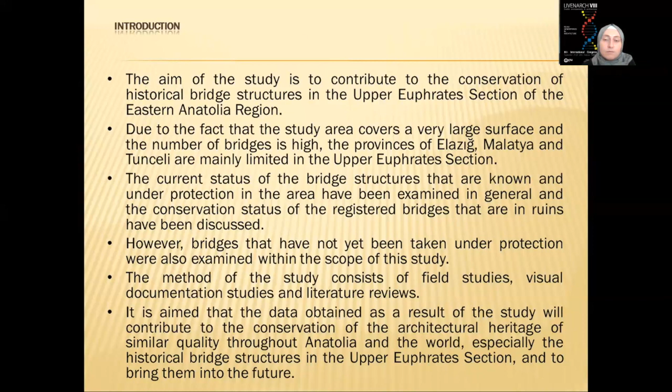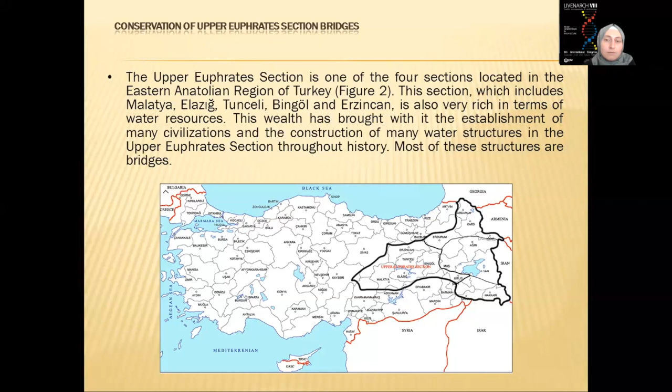The upper Euphrates section, as you can see on the map, includes Malatya, Elazığ, Tunceli, Bingöl, and Erzincan provinces, and is also very rich in terms of water resources. This wealth has brought with it the establishment of many civilizations and the construction of many water structures in the upper Euphrates section throughout history. Most of these structures are bridges.

Restoration projects of 12 bridges in Malatya, 6 bridges in Elazığ, 1 bridge in Tunceli, and 2 bridges in Bingöl have been prepared, we know. However, only some of these projects have been implemented.

In Malatya: Arapkir Meydan bridges, Tarhanik Bridge, Kale Bridge, Kozluk, Mavilik, Darende Uzunok, and Nadir bridges. In Elazığ: Maden Bridge, Şadyan Bridge, which you can see in this photo, and Polu Bridge, shown here. And in Tunceli: Pülümür Hanım Bridge, also shown here - these are some of the bridges that have undergone restoration.

Within the scope of the study, on-site observations were made in Elazığ, Tunceli, and especially in the Arapkir district of Malatya. According to this, the existence of 27 historical bridges in Elazığ, 10 in Tunceli, and 21 in Arapkir have been determined. However, field studies continue.

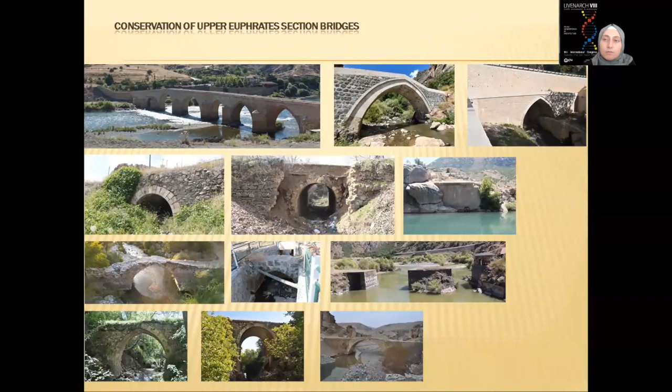So many examples of historical bridges examined on site within the scope of the study, and we can see that some of these structures are abandoned and in ruins, and it's seen that if conservation work is not done quickly, they face the danger of extinction. In this context, the conservation problems of these structures were discussed and suggestions were presented.

So we saw some conservation problems detected on the bridges in there. Some of them, floods and overflows, are the most important conservation problems of bridges. The temperature differences are also important, and especially the change of transportation routes is an important factor in the abandonment of bridges. And also excavations for treasure under and around.

We saw many excavations on the area that under and around bridges negatively affect the strength of structures. And some many registered bridge structures, no conservation work has been carried out yet, and no written, visual, and survey-based documents have been created. For this reason, some bridges can disappear with almost no documentation about them.

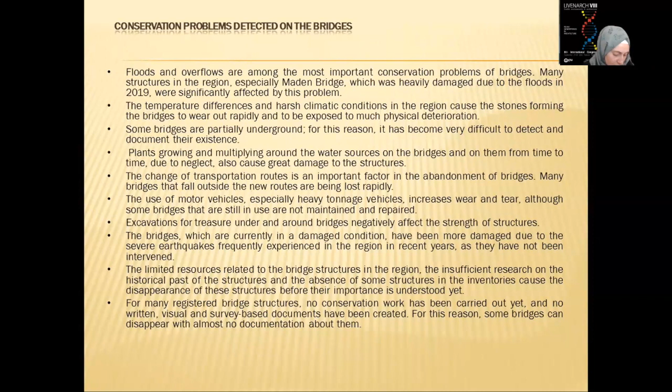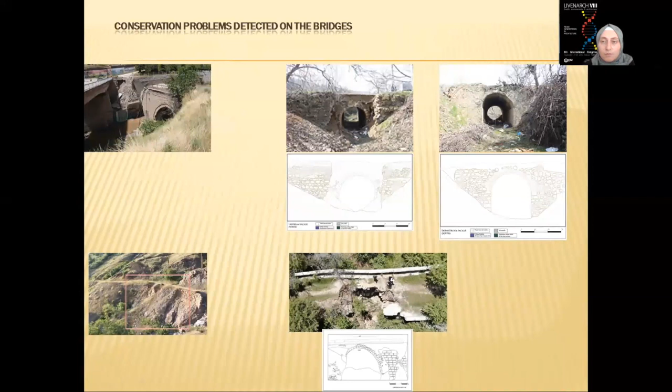You can see the other problems on our full paper also. You can see some problems on these bridges, flood and overflows, abandoned bridges, unfortunately, and some changing roads. Because of the changing roads, they are not using now. So there are some conservation problems detected on the bridges that we see.

As a result, as conclusion, within the scope of the study, approximately 58 historical bridge structures, registered or not, were examined on site. It has been determined that the buildings have common conservation problems in general, and that each has its own problems. In the study, especially common problems were revealed, and we have some suggestions about that.

I will not read all of our suggestions. You can see all of them on our full paper also.

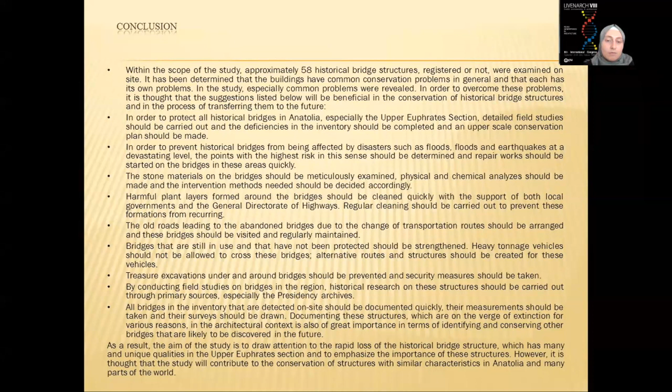So as a result, the aim of the study is to draw attention to the rapid loss of the historical bridge structure, which has many and unique qualities in the upper Euphrates section, and to emphasize the importance of this structure. However, it's thought that our study will contribute to the conservation of structures with similar characteristics in Anatolia and many parts of the world.

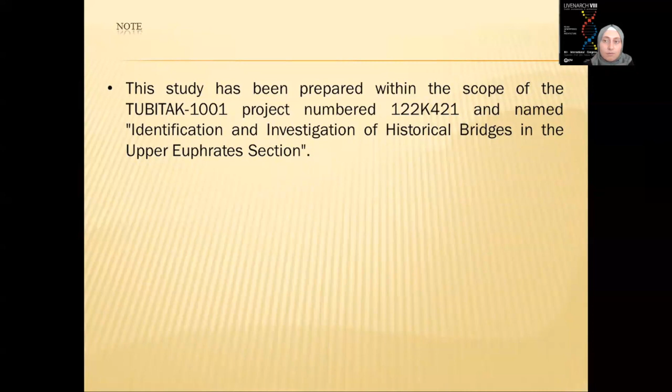And I'd like to add this note that this study has been prepared within the scope of the TUBITAK-1001 project, and its name is Identification and Investigation of Historical Bridges in the upper Euphrates section. The project is continuing. I believe that we will discover many bridges in this area and our references. Thank you for your attention.

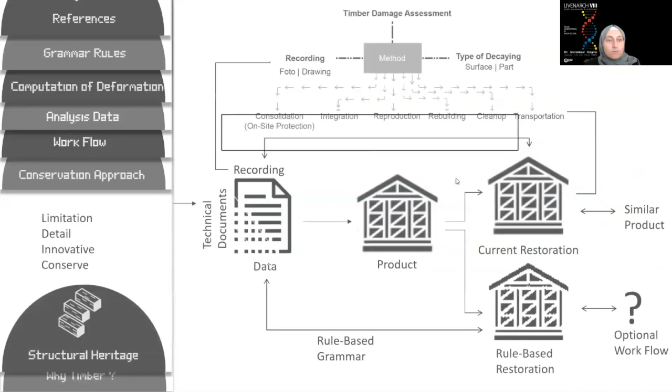After that, when we look at the current restoration process, the records utilized are based on conventional recording methods, such as technical documents and photographs. In addition, since the operations performed in the existing restoration method have a linear workflow, in this study, since the proposed approach method is rule-based, we can control it step by step.

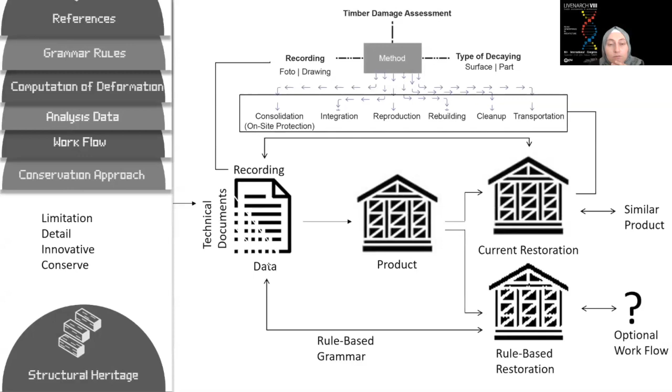The records used are considered as data. These data are considered as intangible heritage.

As a case study, the Göceli Mosque in Samsun Çarşamba was taken. This mosque was built with wooden masonry technique and the original joint details are visible. Since then, it has undergone two separate restorations and has been included in the restoration process again this year. As far as it has been examined, deformation and collapses have occurred on the roof of the building.

When you look at the south facade, and here, there is an element that is a buttress. Such an element is missing just opposite.

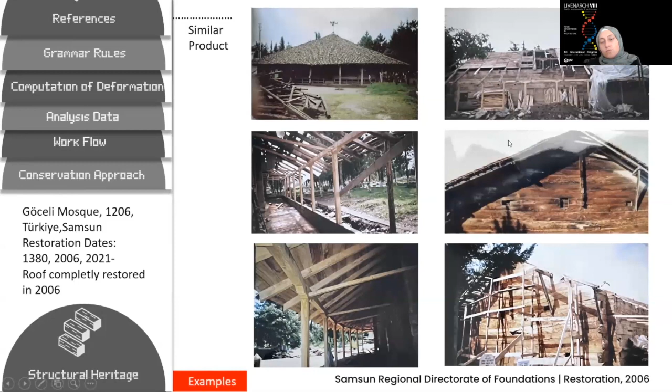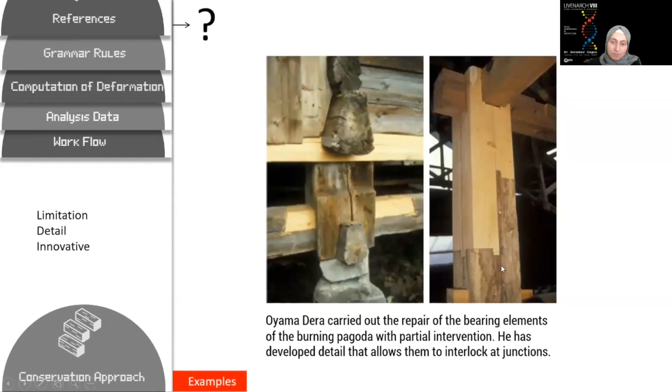In the end, we incorporate the minimum intervention method into a traceable restoration process, and we can incorporate the technique that reflects the oral knowledge developed between masters and apprentices with a computational approach in the restoration process. This carpentry knowledge is intangible heritage, so we must use this knowledge.

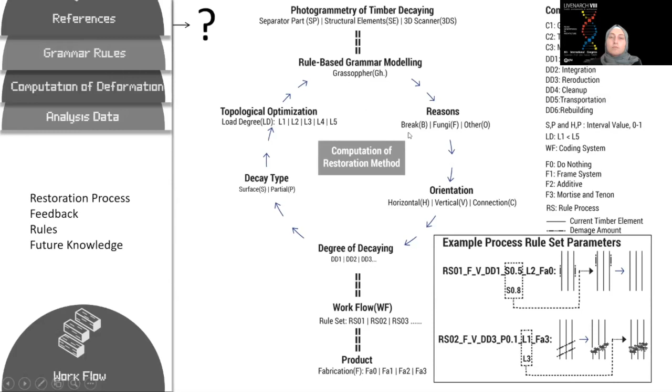As a result of the workflow, production can be made. In fact, it can create an identity of the historical structure element. Now let's talk about the analysis.

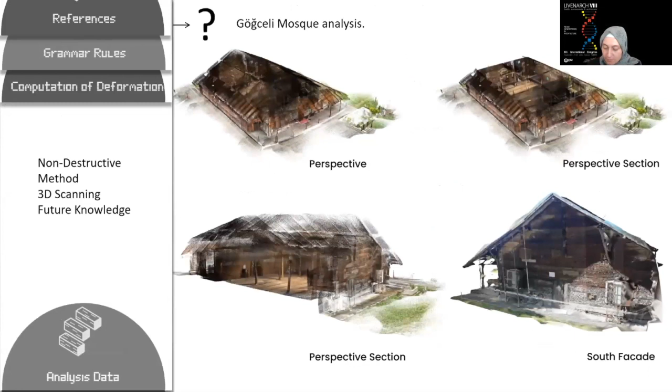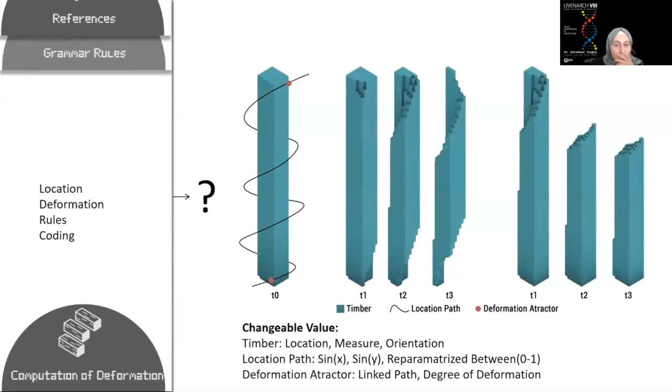Integral to the detection of this degradation process, a topological optimization, number one, is also included. The intersections of the places where the load passes and where the deformation occurs are obtained digitally. This result determines where to apply the rule-based grammar.

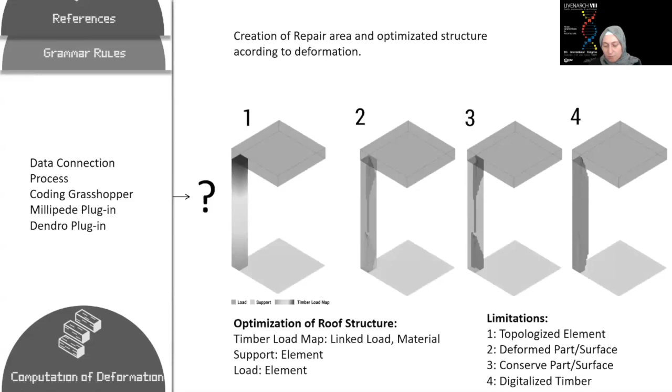After that, as for the rule-based grammar, the rules were obtained according to the way the joint detail comes together and the mortise and tenon situation.

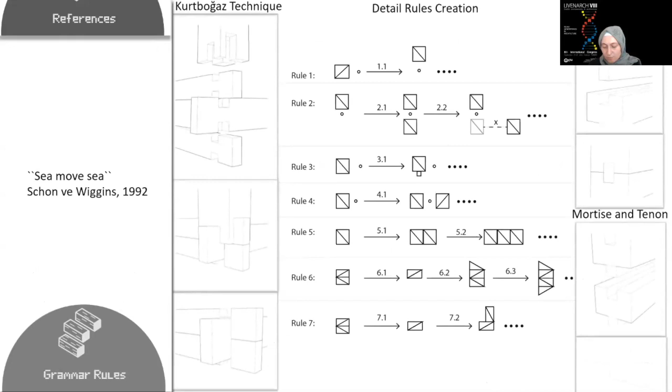In this slide, we see the combination systems formed in the structure depending on the intersection of the rules. As shown in the previous slide, as a result, in this study, master-apprentice carpentry knowledge, which can be considered intangible heritage, was included in the restoration process with a computational approach.

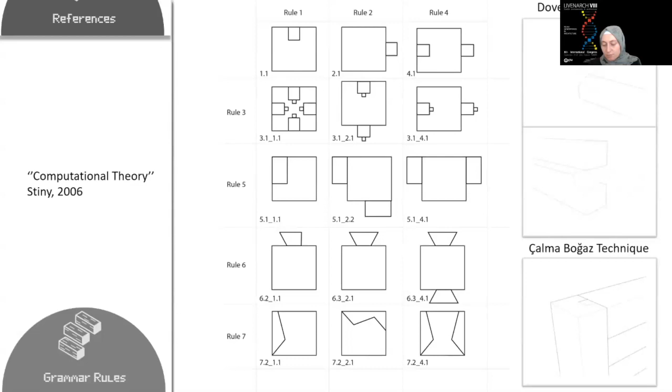The basic steps of the traceable restoration workflow were created. This study investigates how to eliminate the problems that may be experienced in the repair of traditional wooden structures. Thank you all, and our study is open to your questions and comments.

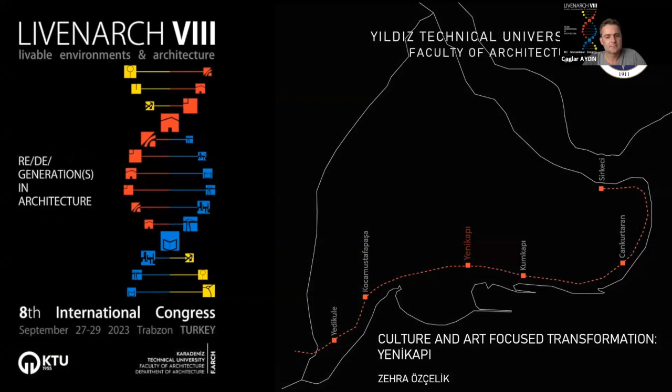Hi, my name is Zehra Ozcelik. I'm a master's student in the Urban Space Organization and Design program at Yıldız Technical University, and I'm also a research assistant there. In my study, I have proposed strategic decisions focusing on culture and art to regenerate Yenikapi.

The flow of the presentation includes an abstract, introduction, literature review, case study, conclusion, and references. Preserving the cultural heritage and memory of cities is crucial for maintaining urban identity and values. Therefore, strategies for conserving cultural heritage and memory during urban regeneration are essential. This study primarily focused on cultural and artistic elements such as supporting cultural activities, preserving archaeological sites, and promoting tourism.

The study involved data analysis to understand the area's significance and the development of strategies for its regeneration based on the analysis results. The aim is to provide decision-makers with guidance for the city's regeneration. The proposed strategies aim to preserve the cultural memory of the Yenikapi region as a heritage area. The study takes a comprehensive and systematic design approach to evaluate regional and urban relationships.

A literature review revealed extensive research on the relationship between regeneration, urban development, culture, and art. Regeneration often involves physical rehabilitation, public space beautification, and the integration of cultural and creative industry. In the case study section, the study area's description, methodology, and regeneration strategies are explained. The Yenikapi region, with its historical significance, is examined in detail.

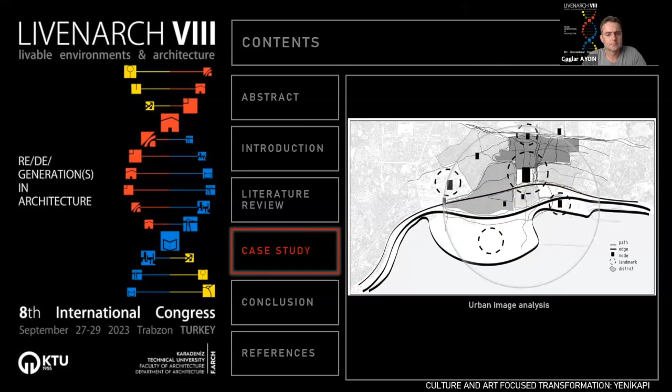The goal of the study is to create a roadmap for revitalizing the historical urban area, which has lost its vibrancy, through social, cultural, and physical interventions. This study also aims to transform the area between the railway and Kennedy Street, a buffer zone with underutilized functions, into an urban attraction.

The study suggests converting the area into a cultural and art center, integrated within historical and cultural layers. Descriptive analysis and spatial mapping were used to visualize the process. Cultural and art-oriented decisions were formulated based on the obtained data, aiming to enhance the area's identity.

It is proposed to reconfigure the area between the railway and Kennedy Street, currently serving as a buffer zone with concrete silos, a gas station, and a transformer station, into a cultural and art center. The aim is to establish a relationship with the station structure and transform it into a focal point.

The study proposes revitalizing the idle railway, creating a cultural road along the historical axis, and transforming the railway's border function. The route would allow cultural and artistic elements to flow from the north to the designed cultural park area. The vision is to create a cultural and art center integrating with historical and cultural layers in its vicinity.

This area was a Byzantine-era port and later an Ottoman Bostan, and will become a recreational cultural park. It will host outdoor artistic activities and connect with the Yalı neighborhood, restoring the open space texture of the past. A circulation system will connect the archaeological areas, improve access to the sea, and create a pedestrian network among cultural spaces along existing and vanished wall traces.

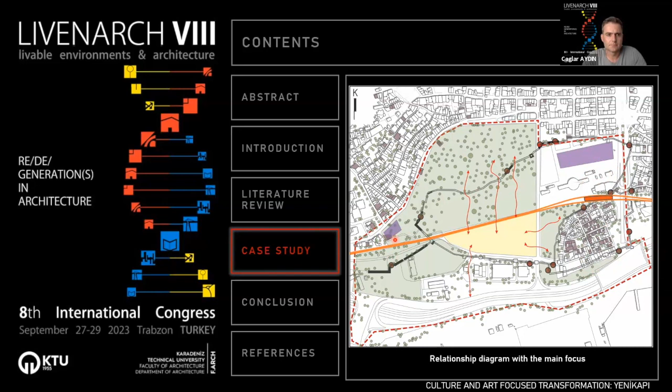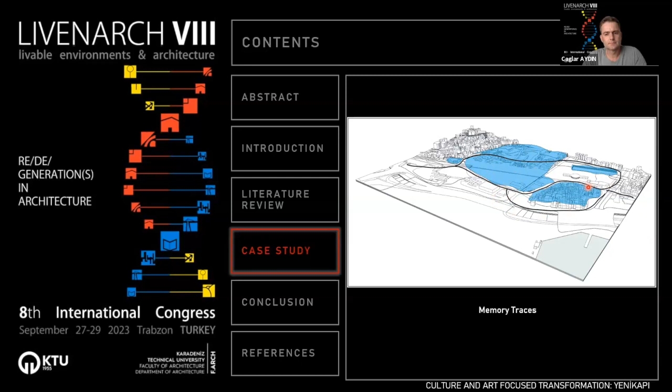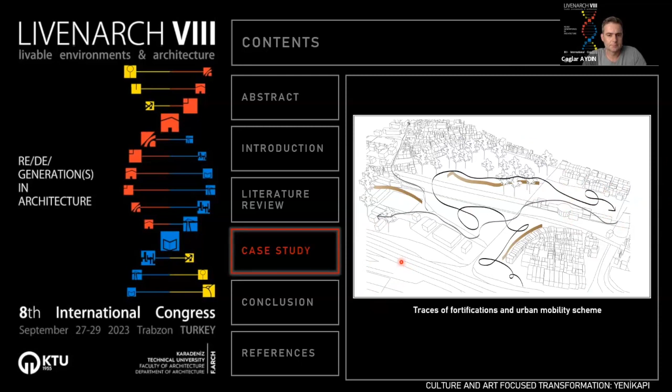Design decisions focus on a circulation axis guiding people from the transfer center and the northern part of the city to reach the sea. The area around the entrance, acting as a gateway to the city for external visitors, is integrated into the overall design, turning it into a focal point.

In this image, you can see the relationship of the focal point with its surroundings: leakage from the field experience into the mass, an area that will establish a relationship with the residential area, and the area where visual relationship with the sea will be.

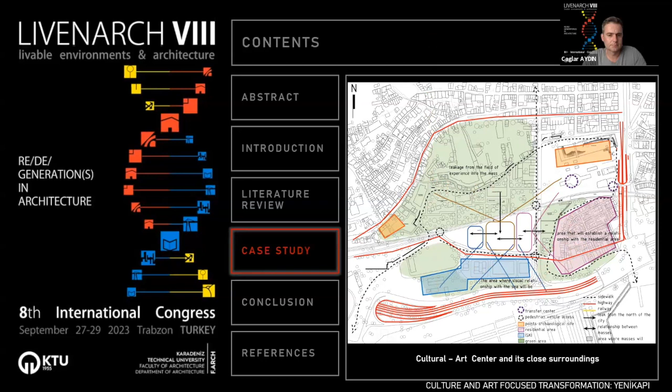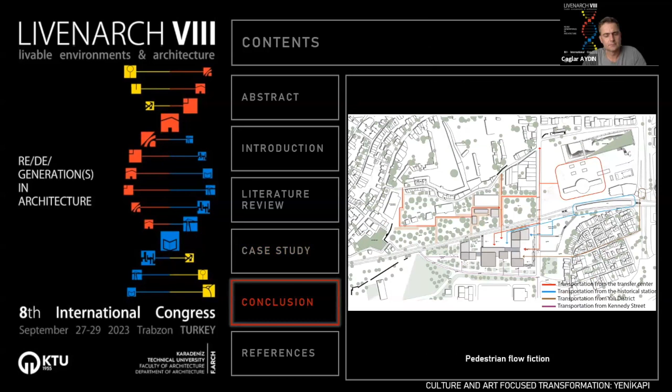In summary, this study focuses on the regeneration of the Yenikapı region, emphasizing the preservation of cultural heritage and memory. It provides strategic decisions for urban regeneration, highlighting the importance of cultural and artistic elements. The aim is to guide the revival of the city, ensuring the conservation of its rich urban identity and heritage.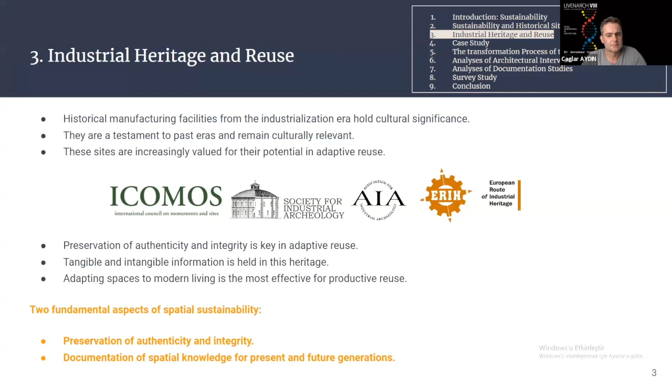In recent years, various communities such as especially Ticcih and Icomos have actively backed this recognition, and they have played a crucial role in involving industrial heritage in reuse efforts within societies. From here, we can find two fundamental aspects of spatial sustainability while transforming spaces: preservation of authenticity and integrity, and documentation of spatial knowledge for present and future generations.

To evaluate spatial sustainability comprehensively, the study employed both tangible and intangible dimensions. The tangible dimensions are analyzed from physical transformations, and the intangible dimensions are analyzed by doing a visitor perception survey.

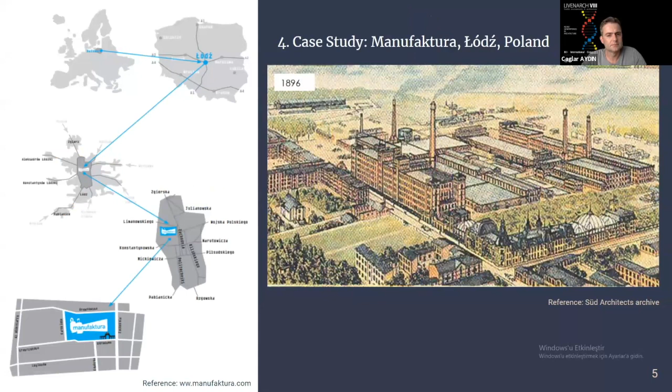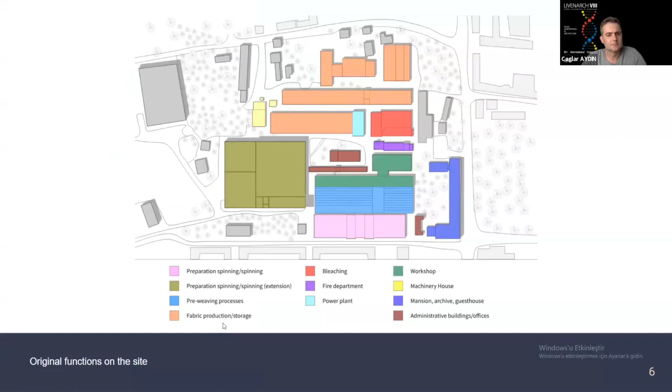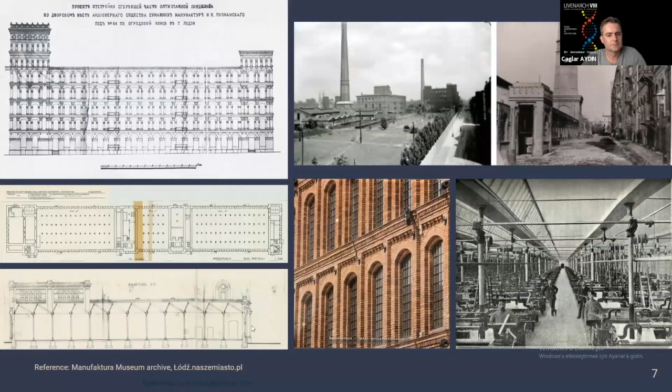If we look at the case study, the area in the 19th century, Manufaktura was one of Europe's largest textile factories. It was a very big production area with different uses like spinning mill, weaving mill, workshops, and more, with a street pattern and courtyards, large spaces with innovative construction techniques, typical industrial area of the 19th century.

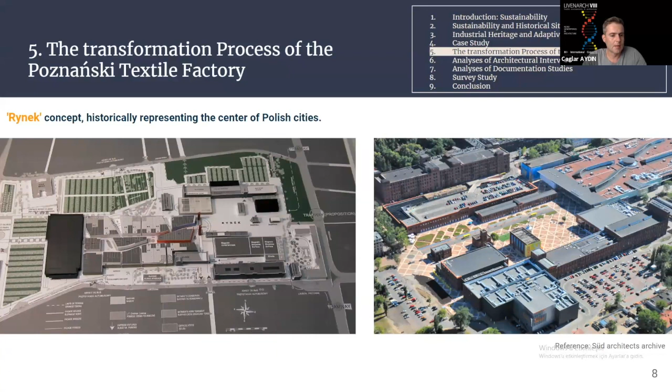The transformation process focused on two main aspects: firstly, removing non-qualified constructions, and secondly, creating a central square as the project's focal point. The central square was actually inspired by a Rynek concept, historically representing the center of Polish cities.

The interventions on existing structures have different approaches. Firstly, some buildings have been completely demolished, while others have been left entirely untouched. In addition, we can also see many removals of numerous buildings in the area, and also some new constructions or additions.

Between these contrasting approaches, we can talk about two main degrees of intervention. Firstly, partial interventions—these involve preserving the structural elements and materials of the buildings while modifying the interior spatial arrangements. Secondly, extensive interventions—these entail significant changes to the internal building elements while preserving just the outer shell.

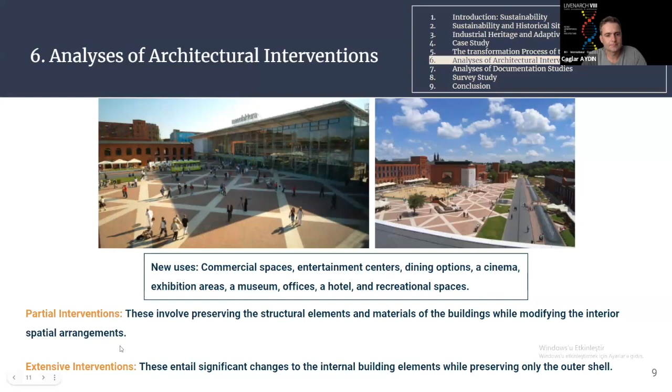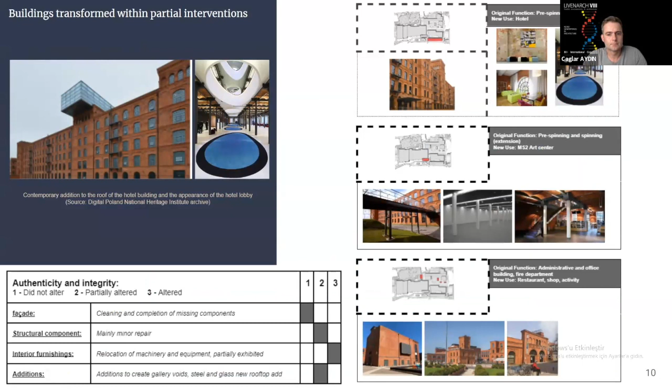In the research, the transformations in the area are analyzed into these two different degrees of intervention. The physical effects of these partial and extensive interventions are analyzed under four main categories: facades, structural components, interior furnishings, and additions.

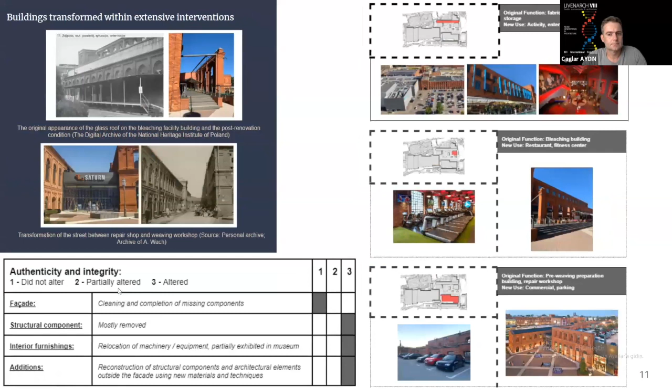All the important changes and additions due to new functions are analyzed. Also, the actions conducted for the transmission of spatial information are analyzed, because it is also an important topic for the transfer of spatial knowledge.

In this transformation project in Manufaktura, we can see comprehensive documentation and archiving during registration studies, and actions like creating information panels for visitors or outdoor exhibitions, and a museum of the factory for today's visitors.

And lastly, a survey study. The survey aimed to investigate how the space is perceived by visitors, their awareness of its original features, and their interest in the history of the area.

In line with the survey findings, a significant portion of visitors already possess prior knowledge about the area's history. However, when it comes to utilizing the information provided, for example in the museum, the responses are divided. While many participants felt the historical and cultural significance of Manufaktura during their visit, a smaller percentage either felt it only partially or did not feel it at all.

Interestingly, over half of the visitors do not express a strong desire for deeper knowledge about this area. And half of the respondents hold a neutral view on the redevelopment's impact on cultural heritage preservation, implying limited influence on their perception.